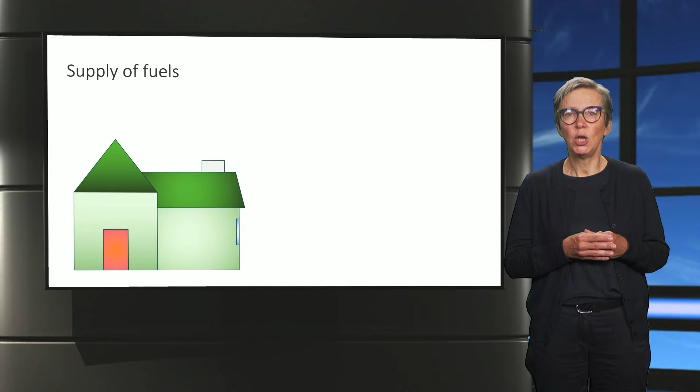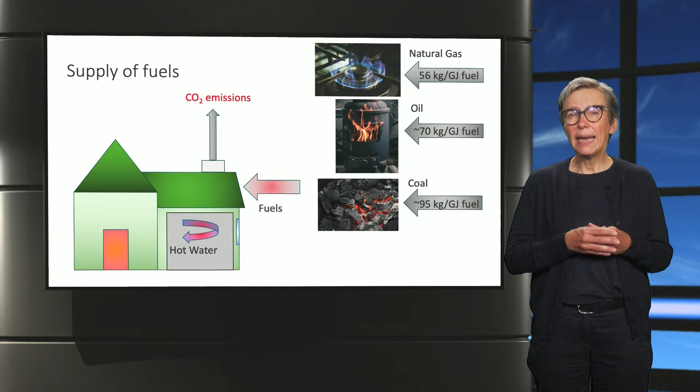Let's start with the most common way to produce heating within buildings, which is locally supplying fuels to a building and converting these fuels inside the building into hot water used for space heating and hot tap water. When fossil fuels are supplied, this leads to CO2 emissions at the building site. Some commonly used fossil fuels include natural gas, coal, and oil. Inside the building, these fuels are supplied to a boiler or stove to produce the hot water.

CO2 emissions per gigajoule of heat used in buildings depend upon two factors. One, the type of fossil fuel being supplied. CO2 emission factors for the various fuels differ, with lowest emissions for natural gas and highest for coal. Secondly, the conversion efficiency of the installation used within the building. Highest efficiencies are achieved in the conversion of natural gas in a high-efficiency boiler, typically around 90%, and much lower efficiencies when using coal or oil in a traditional stove, with efficiencies between 30 and 40%.

Thus, we can conclude that one way to reduce CO2 emissions for heating is by shifting from high-carbon fuels, like coal, to low-carbon fuels, such as natural gas, and from low-efficiency technologies, like traditional stoves, to high-efficiency techniques.

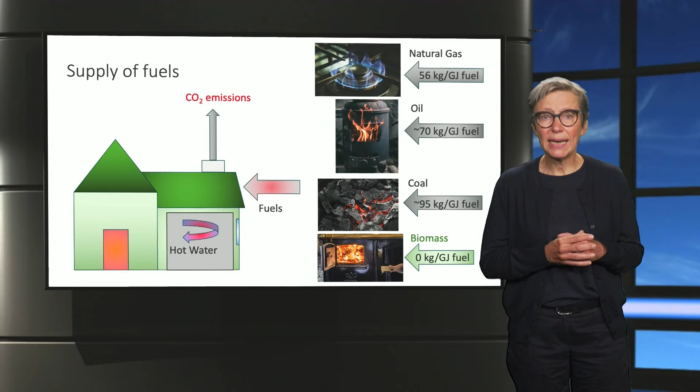CO2 emissions can be further reduced by using biomass. Biomass energy is considered carbon neutral if growing biomass removes as much CO2 as is emitted into the atmosphere from its combustion. Keep in mind that biomass can have a negative impact on local air quality, so it needs to be carefully considered. A second way to produce heating in buildings is by means of electricity.

This usually implies that the building is connected to the electricity grid. Inside the building, the electricity is converted into heat. This electricity is usually produced outside the building. For this production, either fossil fuels, like coal or natural gas, and/or renewable sources, such as wind energy, are used. When fossil fuels are used, this leads to CO2 emissions. As you might remember, we labeled these as Scope 2 emissions.

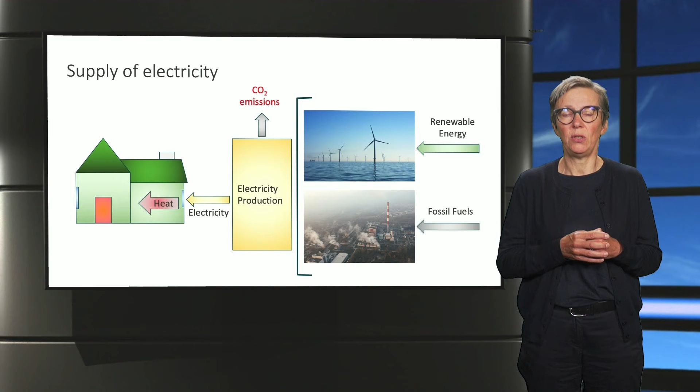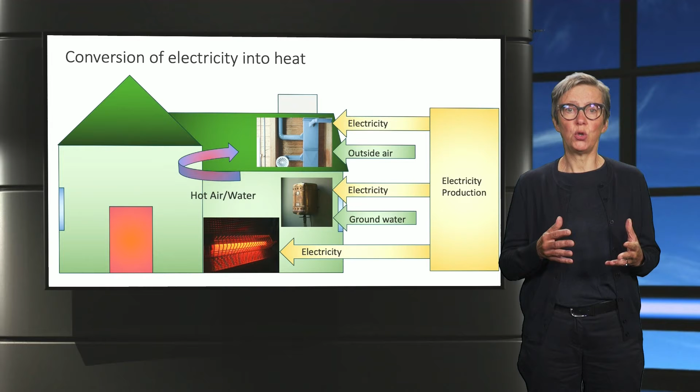Now let's investigate some options to convert this electricity into heat inside the building. The first option is using a simple resistance heater in which electricity is converted into heat for heating a room. A more advanced option is the use of a heat pump. A heat pump uses electricity and energy from the outside air or groundwater to produce heat for space heating and hot water production. The advantage of using a heat pump is that besides producing heat in cold periods, it provides cooling in the summer period.

The efficiency of a heat pump is expressed in COP, coefficient of performance, calculated by dividing the delivered amount of heating and/or cooling by the electricity supplied to the heat pump. The higher the COP, the more efficient a heat pump is and the less energy it consumes. Typically, 1 unit of electricity delivers 3 to 5 units of heating. Please note that the heat produced by a heat pump has a lower temperature than heat produced by, for example, a gas boiler. So to have a comfortably warm building, it needs to be sufficiently insulated.

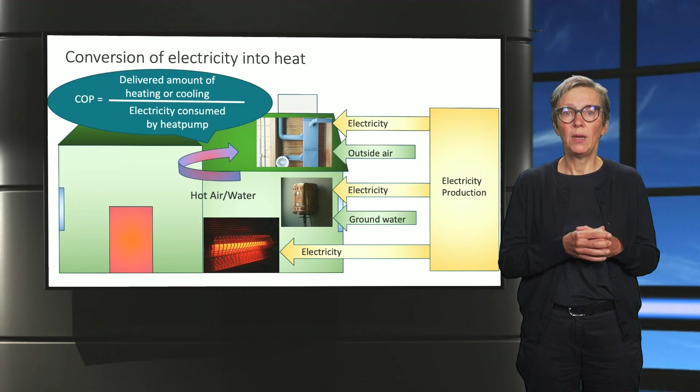The third option is to supply centrally produced heat by connecting a building to a heating grid. This can either be a large citywide heating grid or a small local grid. In both cases, the heat is produced centrally and subsequently transported and distributed to the buildings connected to this grid. Inside the building, the delivered heat is used for space heating and/or hot water production.

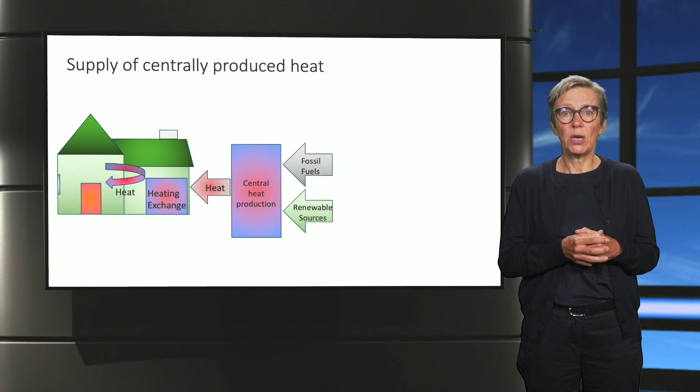As you can see, the heat is produced outside the building with either fossil fuels or renewable sources. In case fossil fuels are used, this leads to CO2 emissions which are emitted outside the building. So these are also Scope 2 emissions.

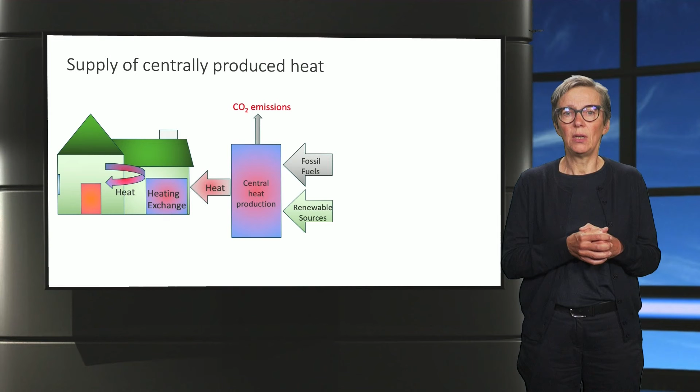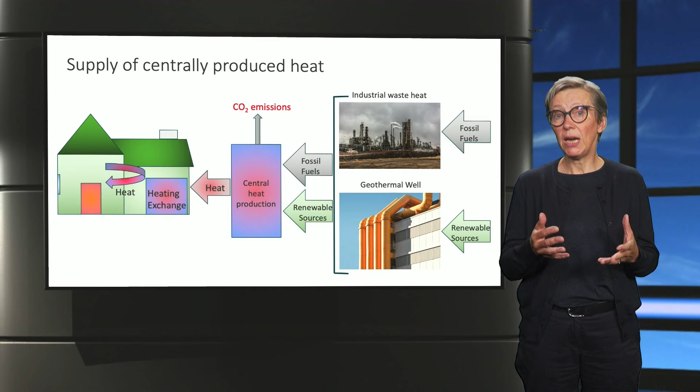There are several heat sources used to supply heat to buildings, like waste heat from industrial processes or heat from CO2-free sources like a geothermal well. Please note that heating grids are only applied in densely populated areas because investments in the transport infrastructure are high, and in order to recover these costs, you need a very concentrated high heat demand.

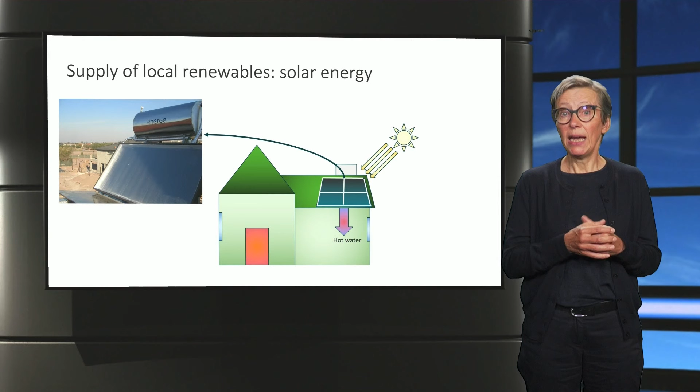Finally, we can use energy from the sun to supply heating to a building. In this case, energy from the sun is used directly to produce hot water for space heating.

However, as discussed earlier, there are some issues and restrictions that need to be considered. CO2 reductions need to be balanced against the impacts on local air pollution and upstream CO2 emissions. District heating can only be applied if heat sources are in the proximity of relatively densely populated areas with a concentrated high heating demand. CO2 impact of options that require input from electricity strongly depends on the efficiency and CO2 content of the sources used to produce this electricity.

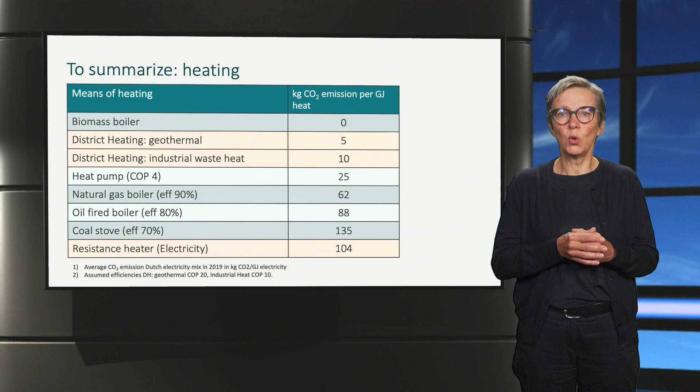So far, we discussed heating, but also noticed earlier the demand for cooling is increasing. Due to rising temperatures and increases in income, more and more people can afford to buy air conditioning equipment. Like with heating, the most effective measure to reduce CO2 emissions is to prevent the need for cooling, for example, by applying insulation and designing buildings in such a way there is no need for cooling or the need is minimized.

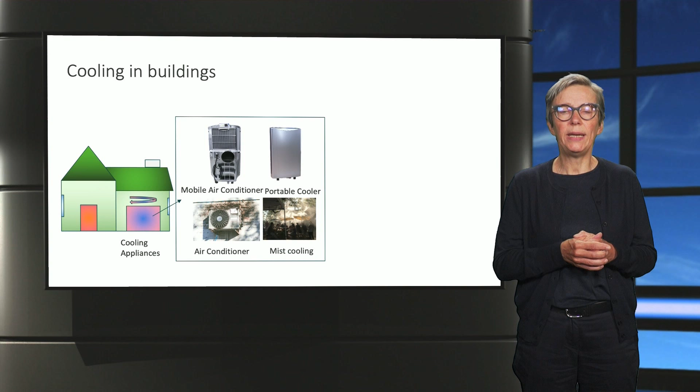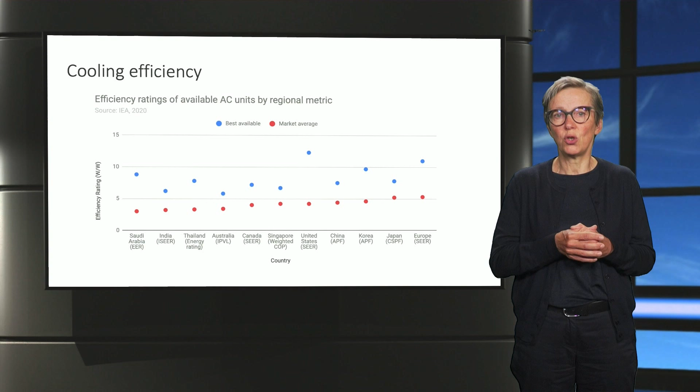The red dots represent the average efficiency of cooling equipment sold on the market in a specific region. The blue dots represent the best available on the market. It's very clear there is substantial room for efficiency improvement in cooling. Thank you for watching this video.